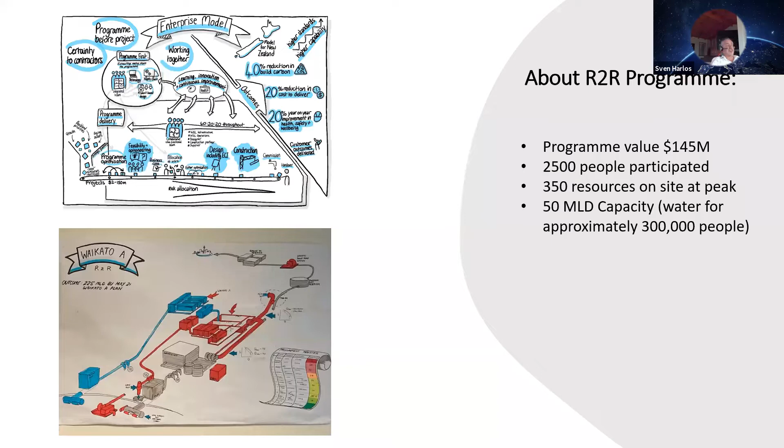The whole program was based on our enterprise model, the way we deliver infrastructure over the next 10 years. It's about $8 billion in our asset management plan that we have to deliver to keep Auckland's water and wastewater services running and keep up with population growth, renewals, and better levels of service. We have partnered with two construction companies, Fletcher Construction and Fulton Hogan, who share early contractor involvement with us, and we partner with them over the whole construction delivery. As I said, $8 billion over the next 10 years on a journey.

This program, the Watercare or the Waikato River to Redoubt program, was one of the first in a series of...

Yeah, let's start there, Farzam. Okay, you got a bit fast, but that's fine.

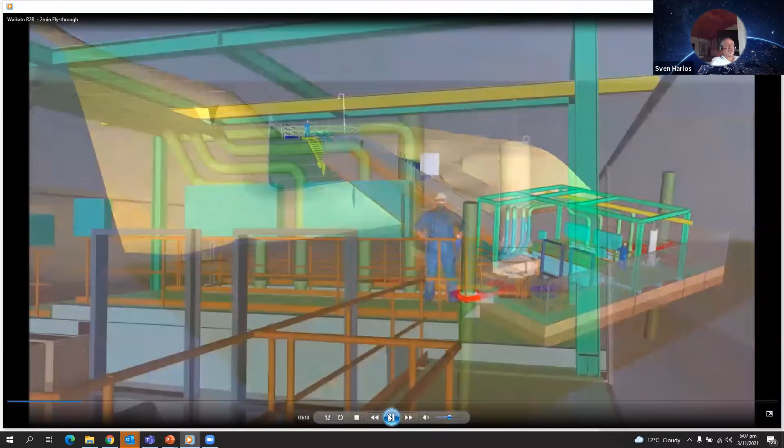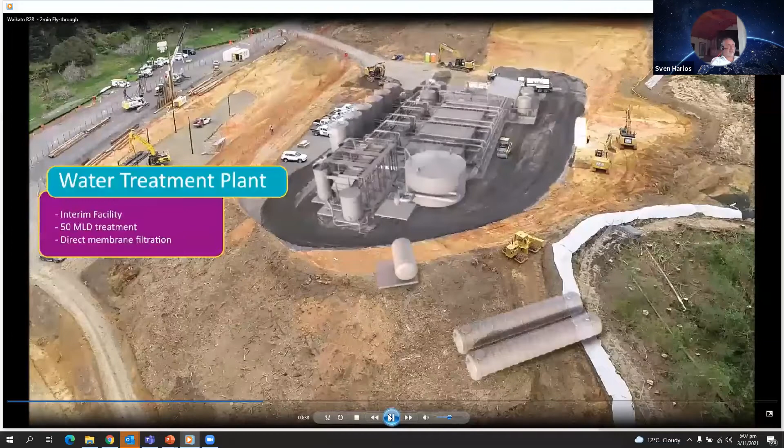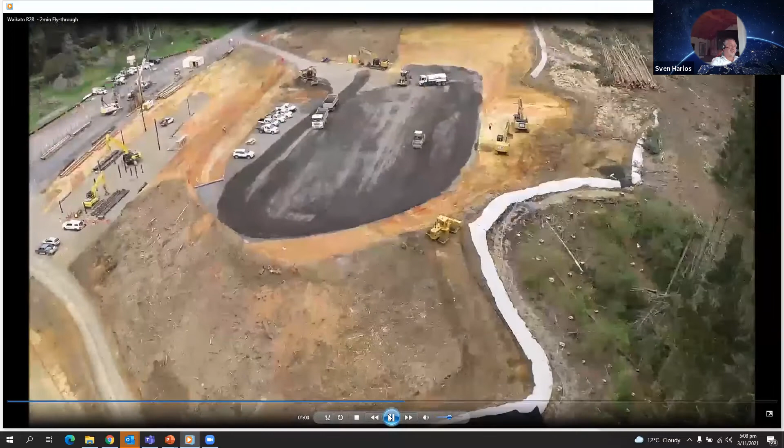And what you see here is the construction platform where the treatment plant was established. Treatment technologies we have used are membrane ultrafiltration technology on the right, some chemical systems, as you see here in the back, with some blowers, and followed by granular activated carbon filtration. At the bottom, we established a chlorine contact tank and a treated water tank and a big pump station, as you see here, to boost the water into Auckland's supply.

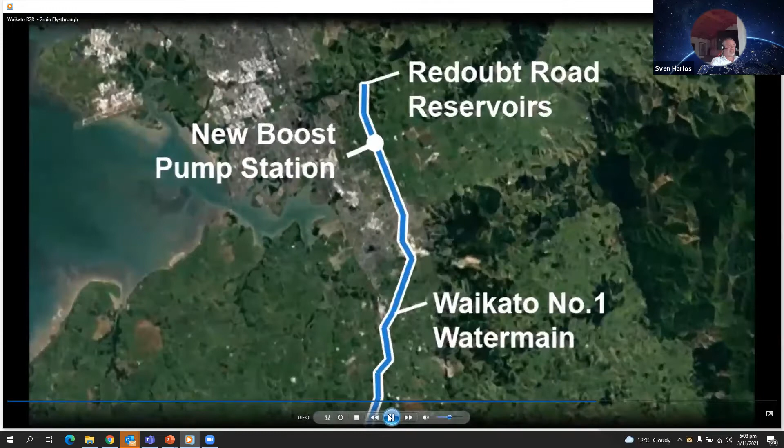We had to connect to an existing water main, a 1200 steel water main, which was achieved during a large shutdown last Christmas, where we could shut down the existing plant. And then that's a 30-kilometer journey into supply. We needed a boost pump station in Papakura because the pipeline can only take 175 megaliters a day.

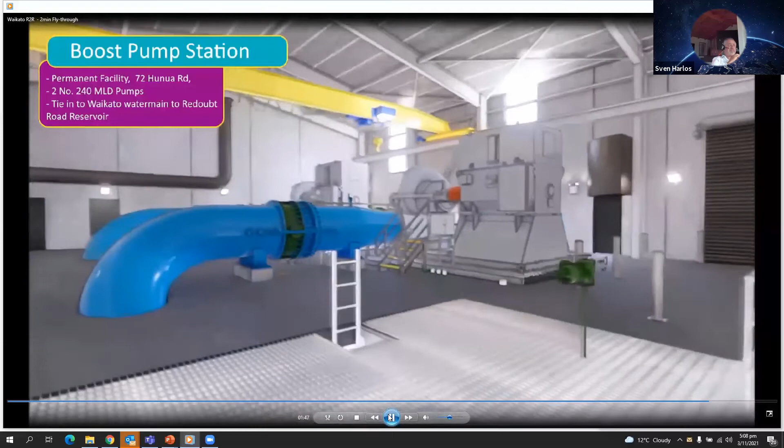We boost another 50. That means we needed a boost pump station to be able to boost the water up to the reservoirs again from a gravity supply, after the initial pumping out of the treatment plant. So very large pumps, 3 meters high, being established here.

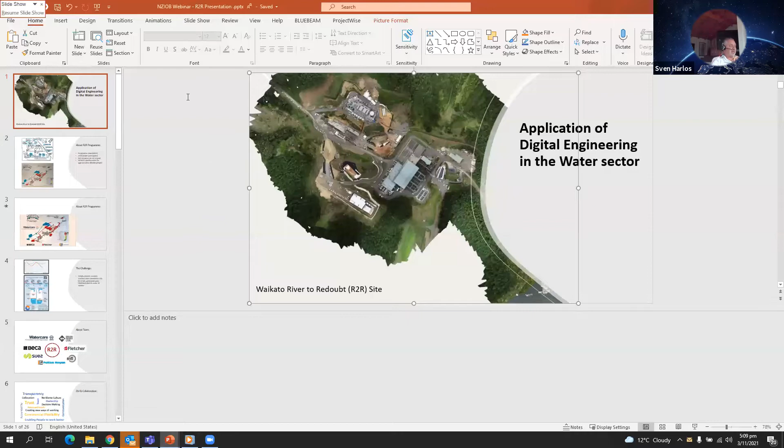And maybe back to the presentation, Farzam. And yes, maybe hang on to this one a little bit.

So what we have is, as I said, an intake in the Waikato River, pipeline up into a raw water reservoir or tank, the treatment plant, and then a pipeline which runs over an existing reservoir at Ransman Road, the boost pump station in Papakura into Redoubt and then into the city. We are supplying from these reservoirs really up to Orewa at the North Shore of Auckland, as well as out west and everywhere in town. So a very large supply area from a large reservoir complex.

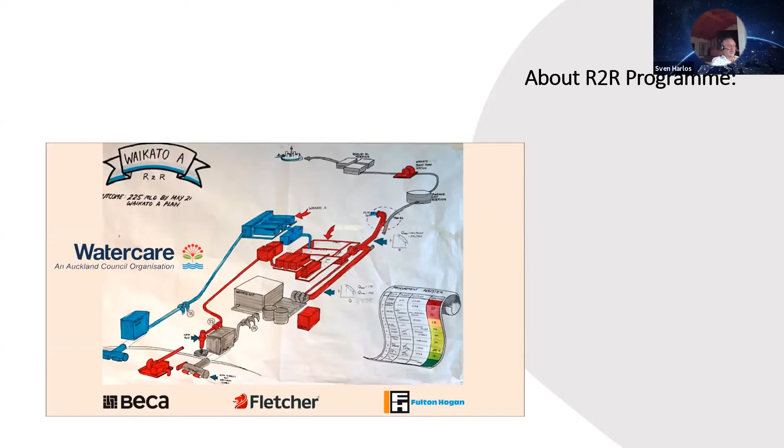About the program and the challenge and why it was all needed and why we needed to do it in 12 months. You will be aware that there was a severe drought in Auckland over the last 2 years. Dam levels dropped below 40%, and unless we were able to construct the plant in a short time, there was a high risk we could run out of water, but also we would have to put severe restrictions in for Auckland's industry and for the people of Auckland, which we tried to avoid by all means.

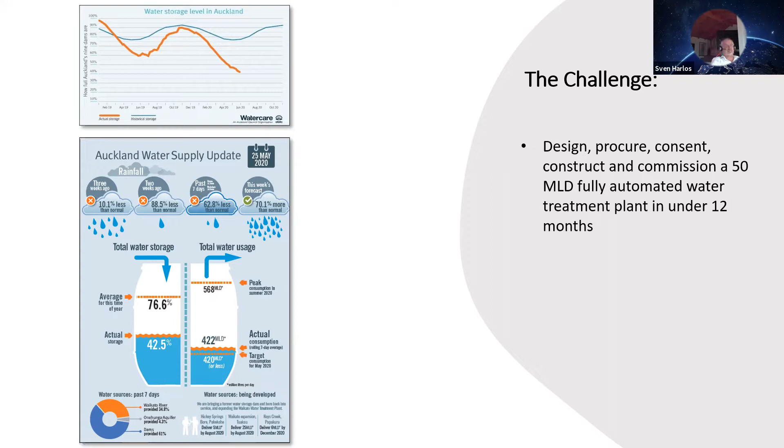So another treatment plant, other sources online being the only way to augment the growing city. Auckland grows by 50,000 people every year, and we have to keep up with our supply and also get more and more drought resilient. So the treatment plant we have established is called Waikato 50, as part of the future larger Waikato treatment plant, which is at the moment at the board of inquiry to take a little bit more water for the last time out of the Waikato River before we have to look at alternative supply sources in the future. Can you go to the next one, please, Farzam?

Let's talk about the team. So we had a challenge. We had to do things clearly differently than a normal program delivery of this size. And what we're talking about here is about 50 megaliters a day. That is equal to the water supply of, let's say, Tauranga and Hamilton together, to give you a perspective.

So we had to really pull out all stops and establish an experienced team, get early supplier integration, get early contractor integration, and all work together very collaboratively from the beginning, with Watercare taking the risk on a commercial model as well, which worked to enable us to construct and design in parallel, and then start commissioning while we were still constructing, to be able to really design, consent, procure, build and commission a water treatment plant of reasonable size of 50 megaliters within 1 year. Next one, please.

We talked a lot about collaboration and no-blame culture. So we all had co-location at the Watercare headquarters, where we all worked together on a day-to-day basis, established teams, had daily sprints, daily stand-ups, agile delivery methods. We established trust with each other.

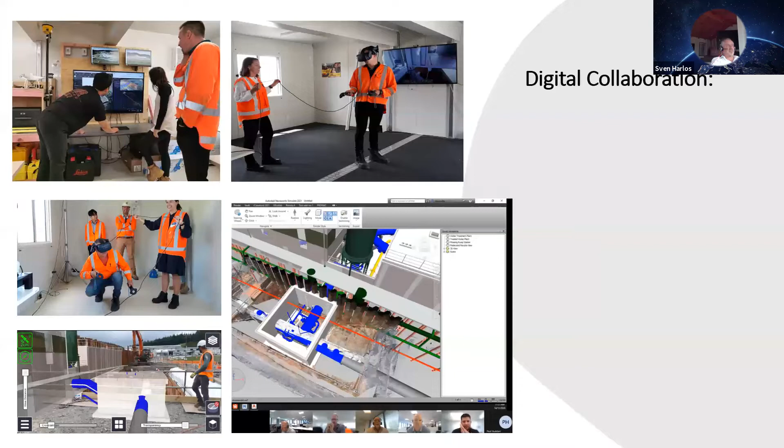We had our board in the virtual reality 3D goggles, where we had this 3D model all presented. We had our operators and maintenance staff walking through the virtual plant to identify the clashes and any problems with future maintenance and operations activities. We used it for construction rehearsals, but I'm sure Farzam will talk much more about the digital world, which we dived into. So I hand over to Farzam to continue. Please, Farzam.

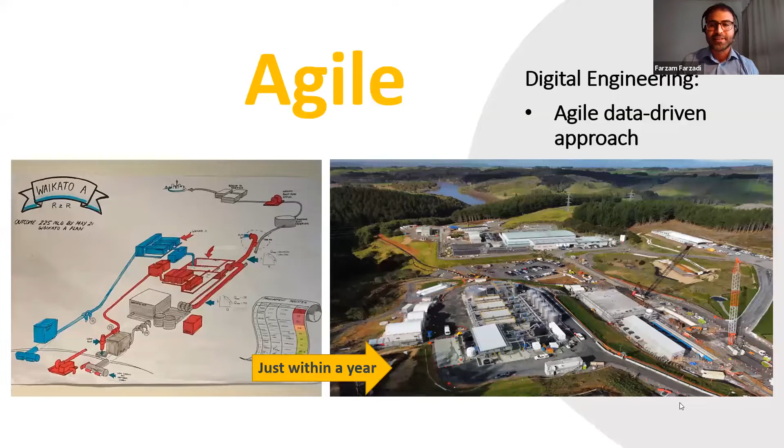The goal was quite a simple one. We needed to go from what you can see in the plan that we had at the start of the project, on the left side of your screen, to the image that you can see on the right side of the screen, within a year. That was literally a challenge and a game, and we identified that digital engineering can be a tool, can be a process that can help us to achieve the required outcomes.

We had a really agile and, I can say, young team that was really keen on identifying a new way of working. And as I said, we identified requirements, and one of the main ones for us was being agile and being as fast as possible. In aviation terms, I can say that approach was that we wanted to take off as soon as possible, while we were still working on developing, building and fixing our plane.

And the objective that we had was that we wanted to be a data-focused team, and that pushed us to a culture of collaboration with a specific focus on digital. And the tool that we identified was that digital processes can help us to develop strategies that help us to achieve outcomes. As I said, the objective was development of new processes, but at the same time being agile and being fast. That created a risk, that created a unique challenge, but we came across really good exercises and good experiences that I will share at the end of my presentation, while we wanted to develop our processes and solutions.

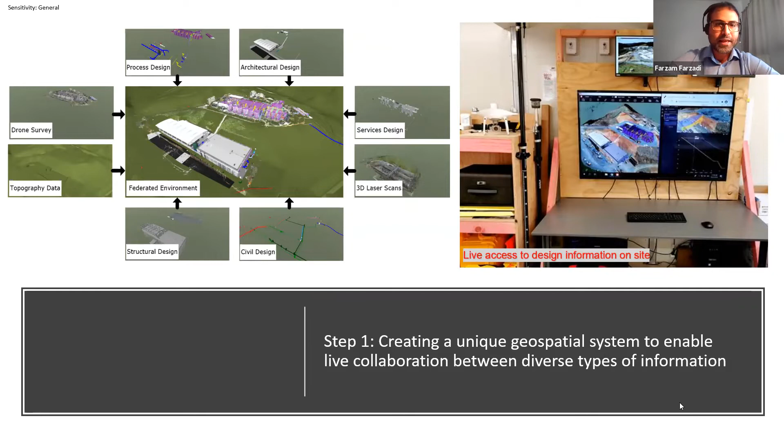The second step for us, after we identified and ticked that first box, the second process that we tried to innovate was how we can automate the process of sharing data. And as I said, we had about 80 design models developed by different designers, and approximately 400 people purely working from BECA, a combination of designers, engineers, planners, who were responsible for creation of information.

And for us it was important how we share a great amount of data within a short period of time. We had approximately 80 to 90% of our design completed within 4 months, but from day one, we shared what we developed with our construction partners and design partners, and a high level of transparency was important to achieve the outcomes of the program. The second goal that we had was to develop a process that can sync, work, and share all the data without manual input, no matter what type of information or model, or who is responsible to develop them. We set up a process that during the 12 months of the design and construction phase shared design models more than 300 times.

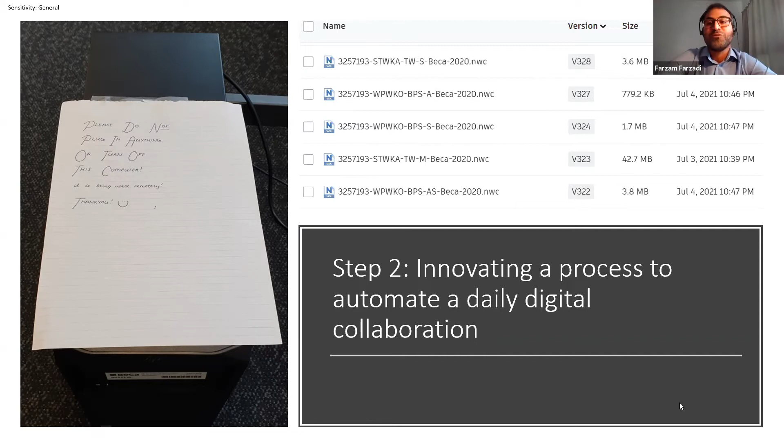By automating this process, we not just saved approximately 200K worth of effort, we saved about 1,000 hours worth of effort that could be spent on other sides of the project, and we needed resources to support delivery of the program.

The third step for us literally started with a risk that we identified. On the left side of your screen you can see two snapshots from our digital environment that we used for visual collaboration, and when we had that capability to share this information with our construction partners and they started using them for construction activities, construction on site started at the same time that we started designing. With the project developing at such a pace, the risk was how we make sure that the data we are sharing with construction teams is ready for construction.

How can we make sure, when we finalized and reviewed just half of our design models and the other half is not ready? As an example, if we have 2 pumps or 2 columns next to each other, and one of them is reviewed and the other is still work in progress, how do we share that message with the construction team, with the Watercare project management team, with our design partners across the country, to understand what is ready for fabrication or construction and what is still work in progress? We learned that simplicity and practicality are keys to implementing new ways of working, and that's what we did at this step.

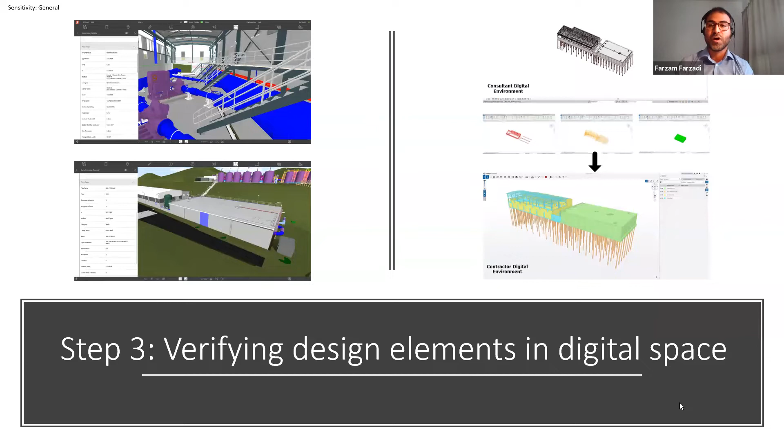We developed a simple parametric approach. In the top right corner of your screen, what you see is a design authoring tool that design teams were using for design. It was literally a parameter that we could import to our models after we reviewed them. And the next day, when this information is shared with our design and construction partners, in the bottom right corner you can see a snapshot color coded in simply 3 colors. Green means ready to be built. Orange means it's still in progress, but almost close to being finalized. Red means at the start of design.

It was a simple way we could share that message without the requirement of sending emails, sending notifications, calling them, or having a meeting with 100 people attending to share that information. And that data could be updated on a daily basis.

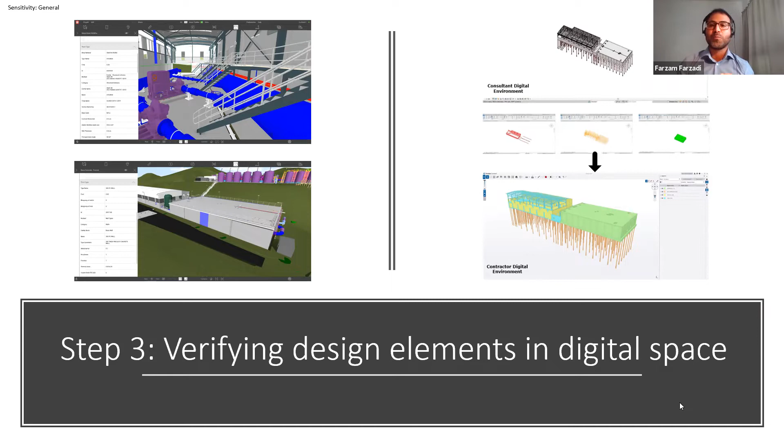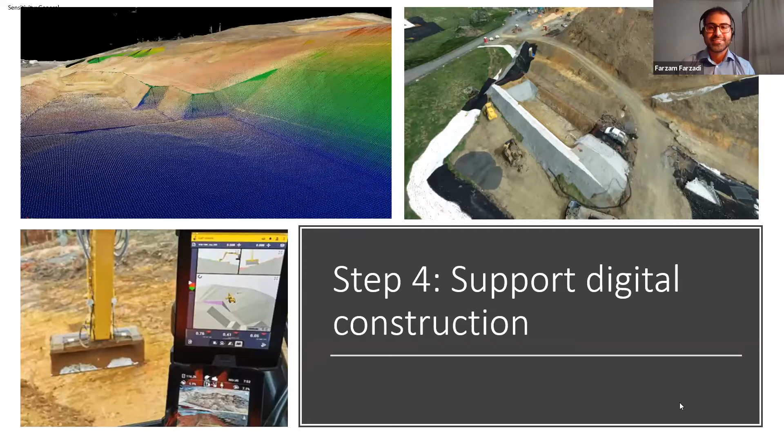The next one on my list that I want to share with you today is how digital engineering has had an impact on sustainability. The way I experienced it on this program was how transparency empowered sustainability. On this program, we shared our data with Watercare and with the construction teams, and literally it was a single source of truth, a digital hub where all data was federated and shared.

They could review our design, and they could review it from a sustainability perspective, and they could have effective feedback on the materials that we proposed, on equipment that we selected, and they could review it and provide feedback to see how we can make sure we select the best materials and the best equipment to meet the sustainability objectives of the program.

And that transparency simply empowered us to make sure that we can meet those requirements. At the same time, by being able to share this information with construction teams, we could share it with subcontractors and site as well, and our construction team literally could start walking the project even before construction started, and that simply helped to minimize rework and minimize variation.

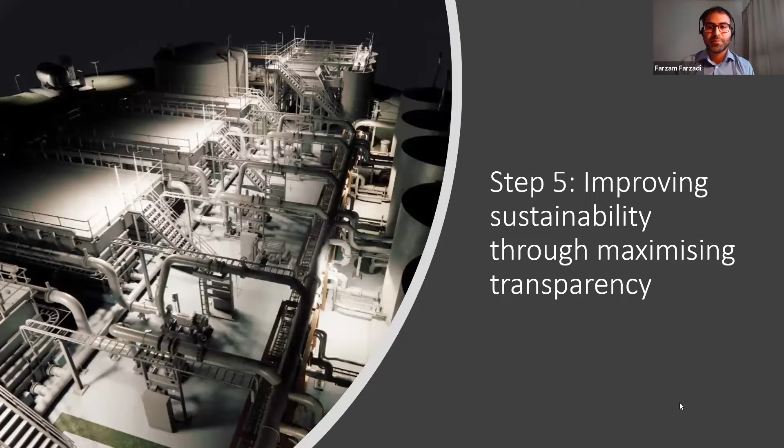And if we can minimize challenges and variations and reworks on site, simply we save material. We are going to use less resources on site. We will need less machinery on site, and consequently, we are going to have a positive impact on overall sustainability approaches and requirements.

The sixth step for us was we started to think about how we can capture asset data for asset management and facility management from our design models that, as I said, were developed via different design authoring tools. And we had a simple challenge here, which I believe is applicable in the vertical sector and specifically for building services design as well. And that is simply how we can define an asset.

As an example, if we have a pipeline that contains multiple valves, multiple pipes, multiple elbows, those elements will be individual elements in a 3D environment, in a digital environment. But from an asset perspective, the entire pipeline, as an example, can be defined as just purely one asset.

And our challenge was how we can create a mapping system so that when we needed data like equipment numbers, pipeline numbers, tag numbers, that we can extract from design models, we can do it while still meeting the asset data requirements and classification systems developed for the program.

And that pushed us to utilize different processes, different platforms, and create a new way of capturing and mapping data, and it helped us create a smart way so that if we populate and capture information for an entire pipeline, in the asset management system it will still be one asset, but when we publish that data and want to host that information in a 3D environment, each individual element in 3D space can host data.

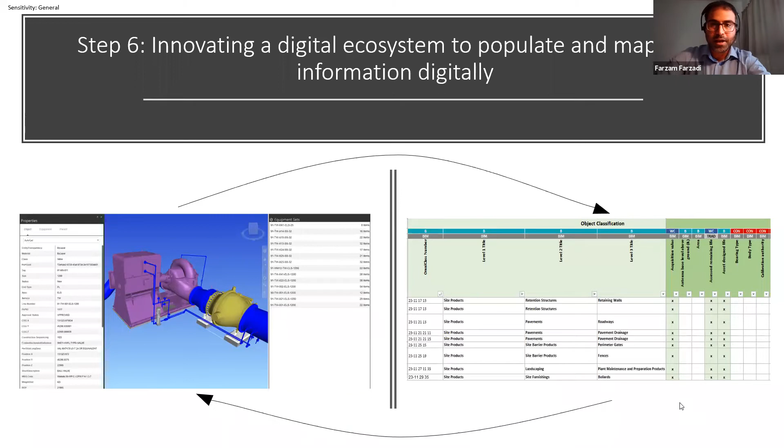Step 7 for us was that we implemented, for one of the facilities developed as part of the R2R program, a facility twin platform. And simply, that facility twin is a platform that behaves and looks like an actual facility and represents actual assets, but at the same time, it is connected to the live, real world. It is connected to the data that will be updated during different stages.

And in this platform, our team worked with Watercare and with our construction partners and design partners. And we created a platform that can host 3D information, 2D information, documents such as classification, and is also categorized, as you can see in the top right corner of your screen, per each asset level. And that's defined based on the asset classification system that we had for the program.

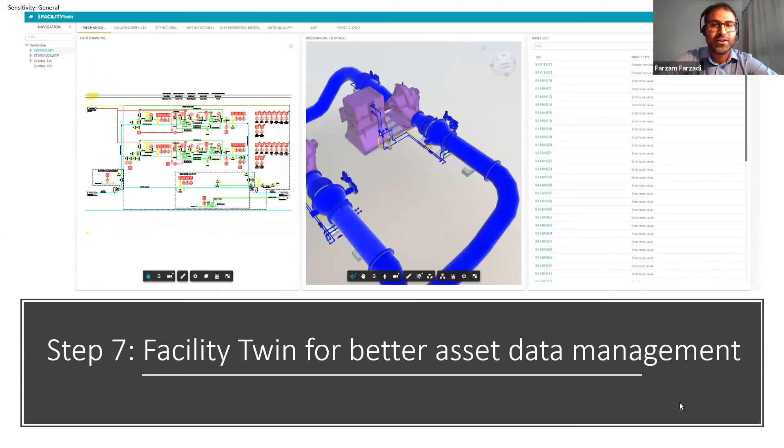You can walk through the program, walk through an asset and a facility, but at the same time, you will have access to the drawings, P&IDs, and the data captured and populated for that specific asset. And as I said, we developed a platform for one of these facilities as a new way of looking at asset management platforms and how this type of mindset can help improve productivity and also help share the right data with the right people at the right time.

And so all these 7 things were part of what the team did and created for the R2R program. But it wasn't always just the fun part. We definitely had challenges. The project was one of the most interesting projects that I've had the fortune to be part of. But at the same time, we had challenges, and those challenges pushed us to think outside the box and come up with new solutions. And if I want to categorize them, I can break it down into 2 different parts.

The first one, which was the primary for me and for our team, was the cultural change. We had more than 2,500 people working for the program, but at the same time, we had, as I said, about 400 people that had input and had impact on creation of information. And that was a significant challenge because on the R2R program, we established a data-driven mindset at the start of the program. And all of us, no matter which company we were part of, committed to it.

But all of us had the challenge that for a great number of years, we used to develop drawings, review them, verify them, issue them. And for a facility like that, we needed maybe 2,000 to 3,000 to 4,000 drawings. It was challenging for us to reduce the number of drawings, to be able to reduce the design phase, but at the same time be able to provide the same level of information in digital format.

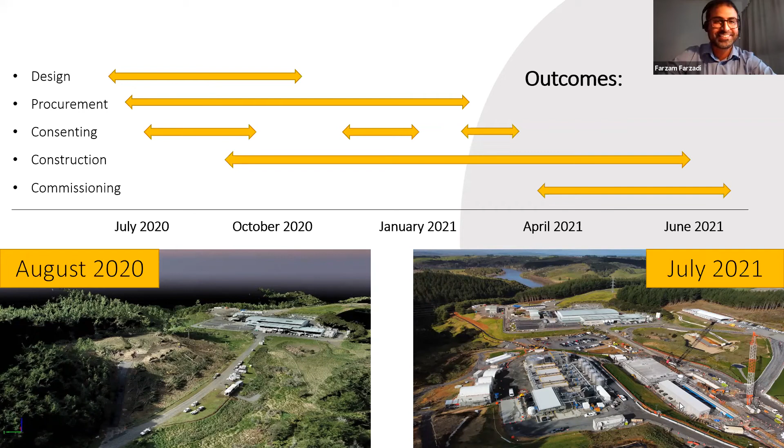Thank you, Farzam. Thanks very much. And I fully agree. I think on this project, we had both. We had fantastic people and the right people at the right time and with the right expertise, but we had also fantastic technology. And I think both things together made this program very, very successful.

What you see here, maybe on the bottom left, you see the picture of where the treatment plant was supposed to be built in August 2020, and we had barely just felled the pine forest trees to be able to establish a platform for the treatment plant. And then 10 months later, there was a fully commissioned, fully functional water treatment plant for 300,000 people, all to drinking water standards and best water quality out of the Waikato River. You can see here in the background the existing plant also.

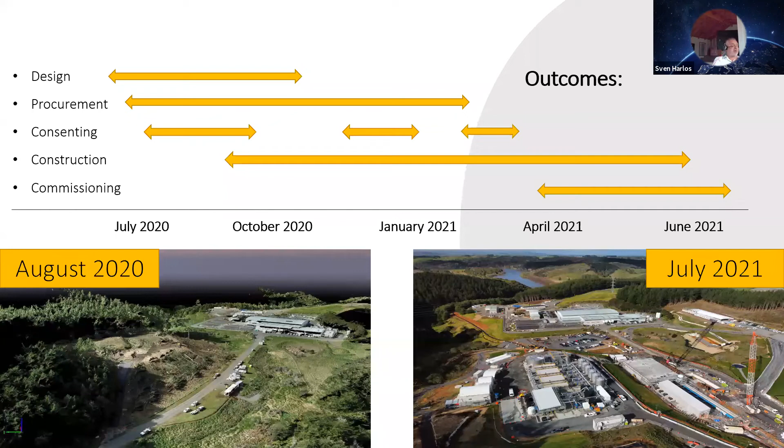So that's most probably Farzam. Can I have the next slide, please? Gives me time to sum up, and looks like I have still a few minutes to sum up the outcomes and the main points we would like to make.

So for instance, a program this size would normally take a year to design, then you need to consent it, then you need to tender it, and then you need to construct it for 2 years and then commission it. So it is at least a 3 to 4 year build under normal design and construct timeframes. And we managed to condense all this into 1 year. Very great outcome. We managed to save also at least $10 million with reduced overheads by condensing the program into this 1 year. We, as Farzam mentioned before, had much less rework.

And it's the first time I worked really truly off a 3D model and designed and built and collaborated and worked also with our operations team on a 3D model with much reduced drawings. We still had some electrical drawings for electricians. They seem not to be able to live without their drawings and loop diagrams, but we had 60% less drawings on this job and worked really the first time truly off a 3D model also into construction and machine controls.